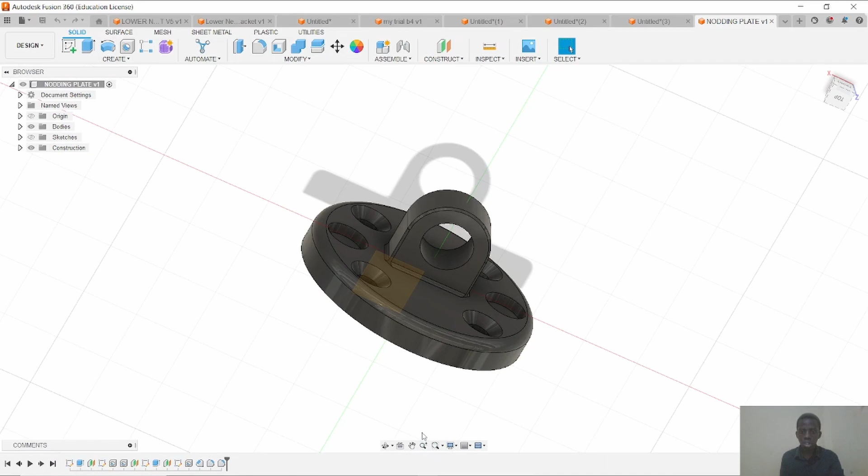Today we are going to be working on a different part, modeling a part called a nodding plate. We'll be able to see it and design it. Without wasting time, let's get started. So what we're going to be designing today is this feature - by the end of the video you'll be able to design this.

Let us go to the documentation, the drawings that have been given. So right here we have the nodding plate. Right here we're going to start by designing the circular body of 2.1 in diameter. Then we're going to create the circles, then later on we're going to create this other part. Let's get started.

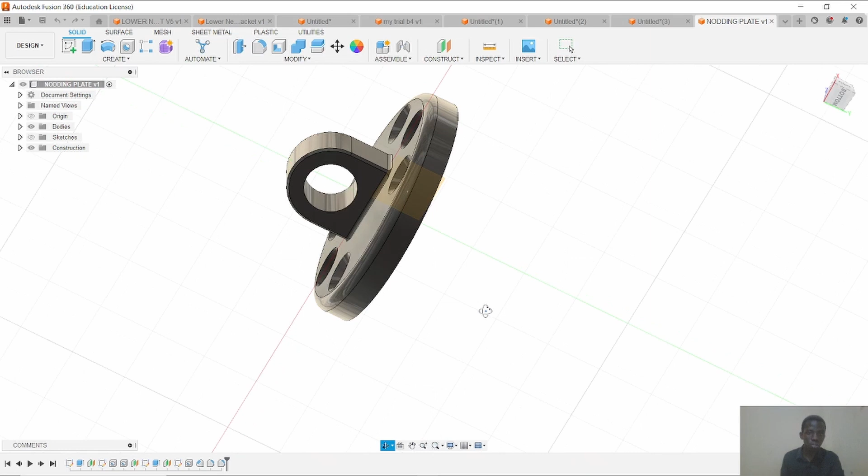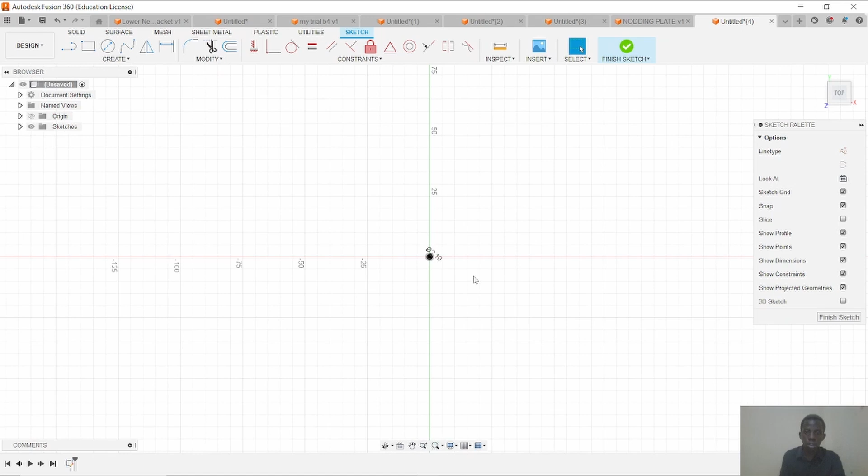Since you've already seen this, I'm going to come here, create new design, come to sketch, click on top. We're going to create our circle of diameter 2.1, I believe - should be, yep, 2.1, circle of 2.1. Enter. It's that small, so I'm going to zoom in.

Once I've zoomed in, I'm going to create a circle which is 1.5 where all these circles are going to lie. So I'm going to create a circle of diameter 1.5. I'm going to come back here, click on this. Actually we can do that after we are done with extruding the body. So let's actually get done with extruding the body, then we can come back to that.

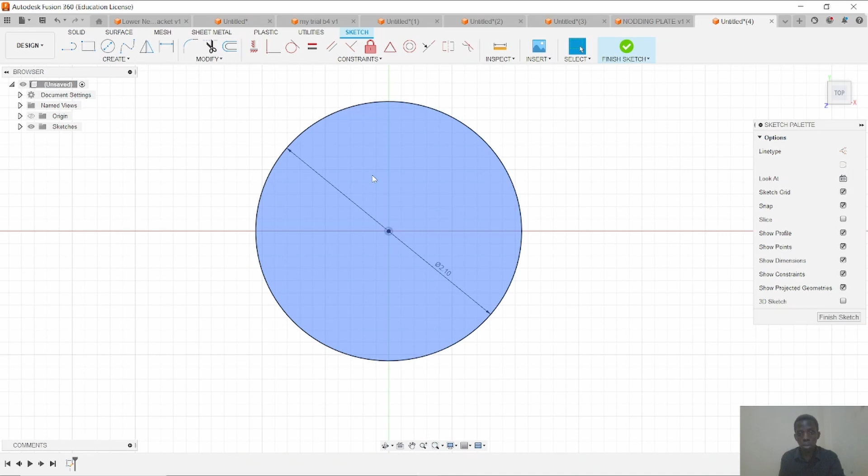So I'm going to extrude my body. You can see here the height of the body is 0.287. I'm going to extrude it by pressing E, 0.287 millimeters. Enter. Let's check on the side view. Yep, that is it. So after doing this, one thing that we're going to notice is...

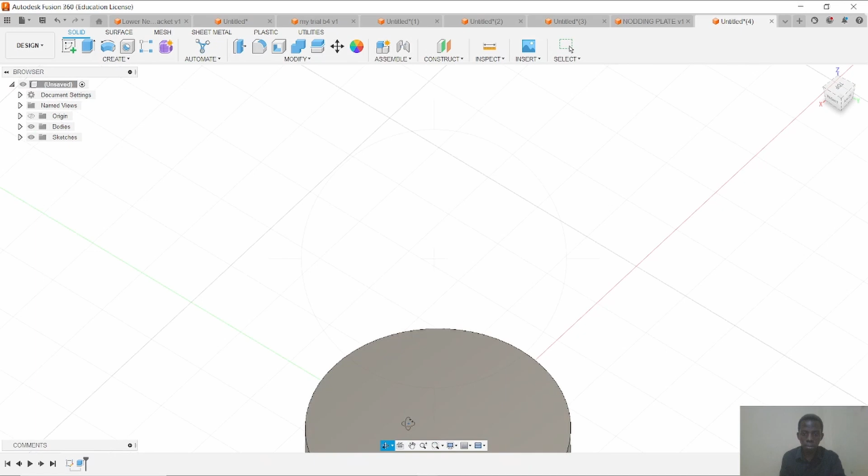Let's come this side. I want to click on top. Let's move it up a bit, or you can just press F6 if your function keys are operational or activated.

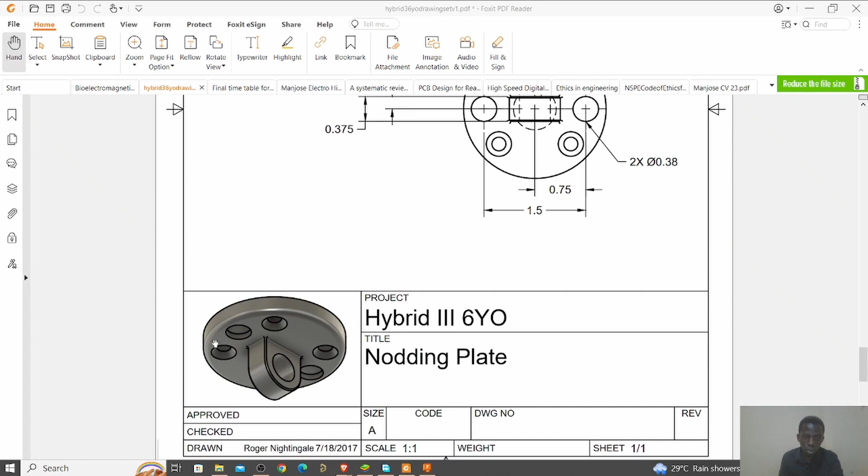After changing this to the top view, what I'm going to do is I'm going to create my circles right here. Let me shift this thing away. So I'm going to create my top circle. All these features are on the top, so I'm considering this part right here to be the top. We're going to create all these features on the top, then later we shall go back to the bottom.

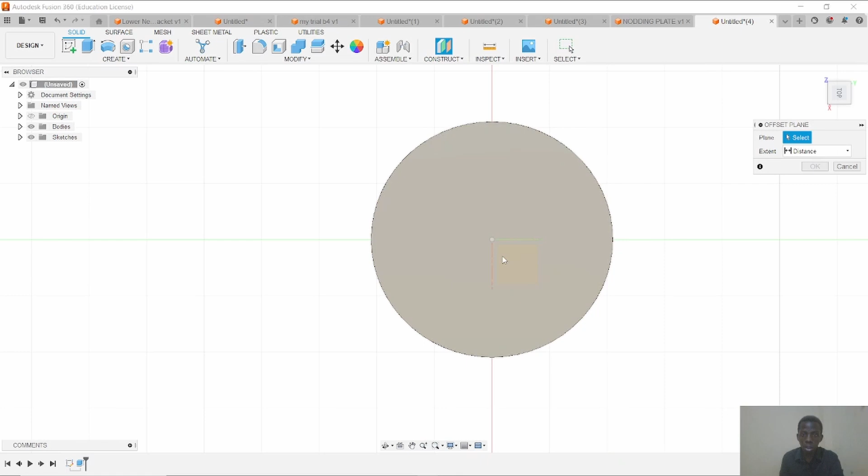What I'm going to do is come to construct, then create a construction, an offset plane right here on the surface of this body. Yes, we want it lying exactly on the surface of our body, as you can see. I'm going to click escape, then click OK. Then after doing that, I want to create a sketch on that surface, rolled the other way around like that.

So after this, what I want to do is create - what I like to do always is first create the diagonals, just in case I need them. I'm going to create another line vertically. After doing that, I'm going to select these two lines, shift select, and make them construction lines.

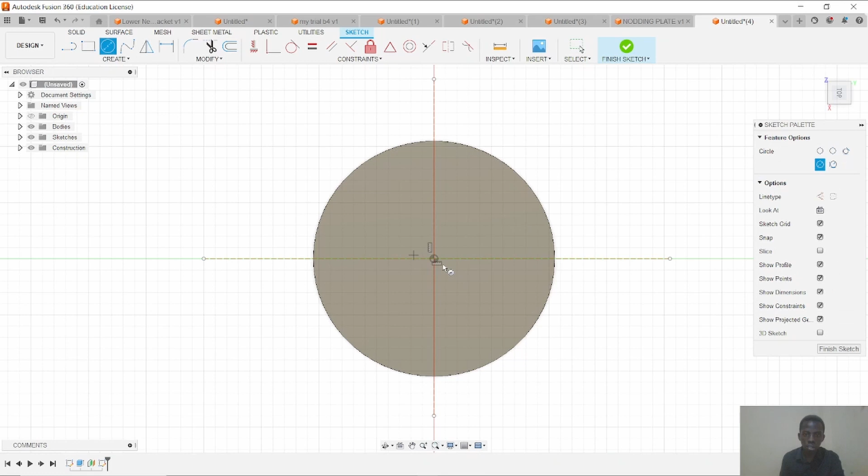Next thing I'm going to do is create a circle of 1.5 - we're creating this circle of 1.5, remember to position our circles right here, so when we're using the circular feature. I'm going to select that circle and make it a construction as well. Then next I'm going to create another line right here.

Let's escape that. Let's press D for dimension. I want this line to be at an angle of 45 degrees with that line. I'm going to click on yep, that. After doing that, cancel that. I'm going to select that line, make it a construction line as well - I want it to have no effect on our sketch.

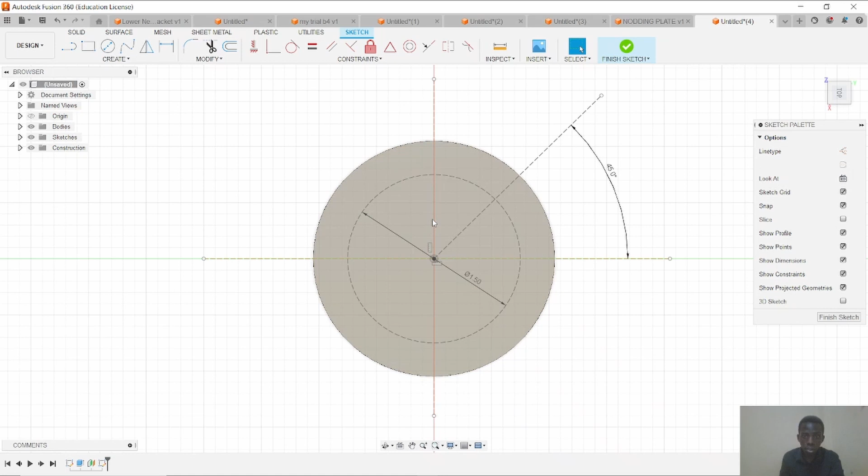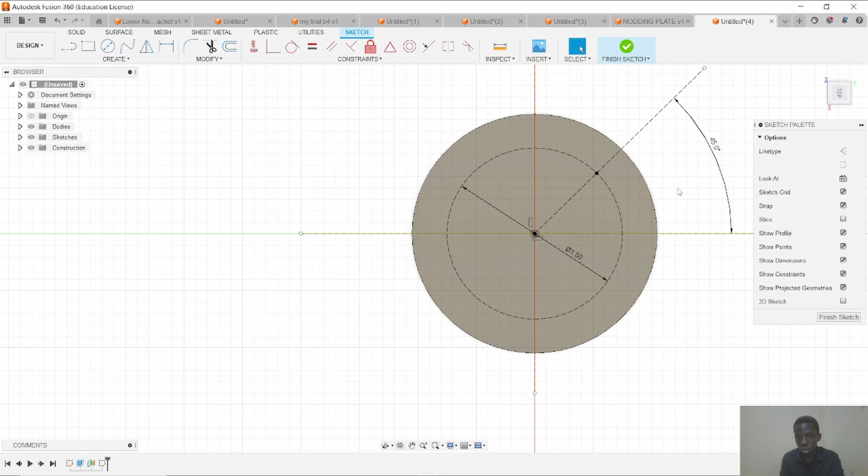After doing that, now we have a point to draw our circles. I'm going to come here, click on this, escape. So after we are done with that, let me cancel, delete, whatever - let's cancel that. So I'm going to zoom out and move our feature quite to the middle.

After doing this, I'm going to use a circular pattern feature to create points for these other 4 circles. So I'll come to create circular pattern, select that point, then select the center point right there. Now we have 4 circles, and as you can see, it has positioned all the points exactly where I want them.

Next we're going to create points for these 2 circles. Let's come to create point, zoom in, drop my point right there, zoom out, escape. Then I'm going to click on this and come to circular pattern.

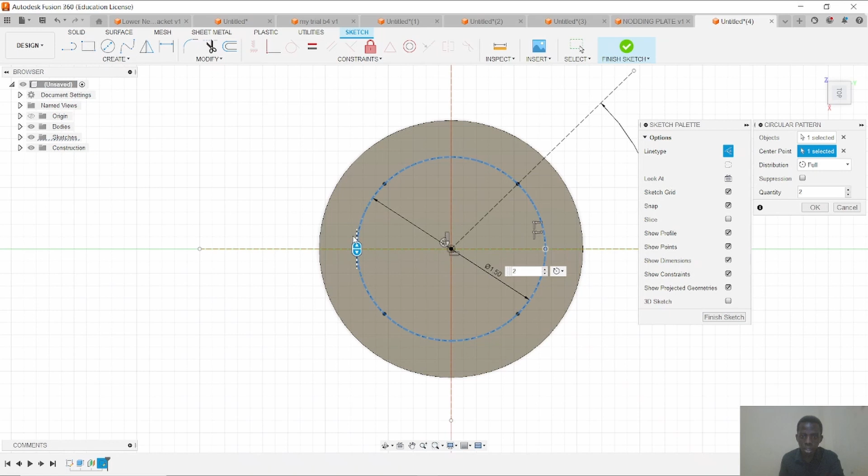I'm going to select the circle as well. For this case, I'm going to say there are 2, because it's only these 2 that I'm talking about right now. So it's going to position it exactly opposite my other feature. I'll say okay, and as you can see, a point has been created right there.

Whether I pick flat or angled drill point actually matters here, because remember our hole is not through — it's going to be hanging on the top, so we don't want an edged point. That is why I've chosen the flattened type of drill point.

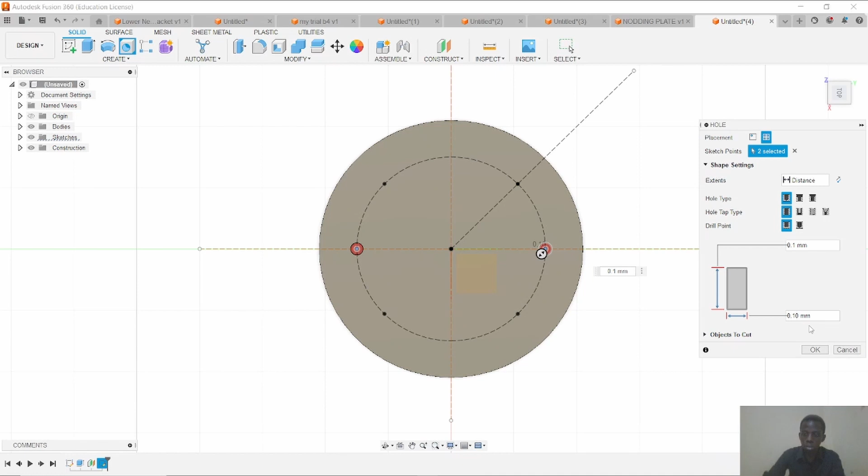So the depth we're going to be drilling is going to be 0.1, and the diameter of our drill circles is 0.38.

Let's look at it from the side so you can understand what I'm doing. Yep, that's what we're doing, escape, and I'll say okay. As you can see, we've created these 2 holes right there.

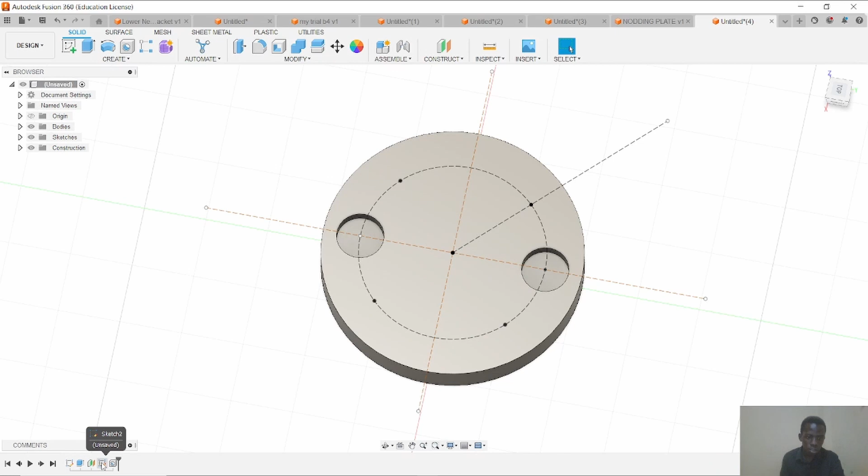Without creating another sketch, we're just going to go back to our sketch right here, right click, then edit sketch, so it brings us back to where we are.

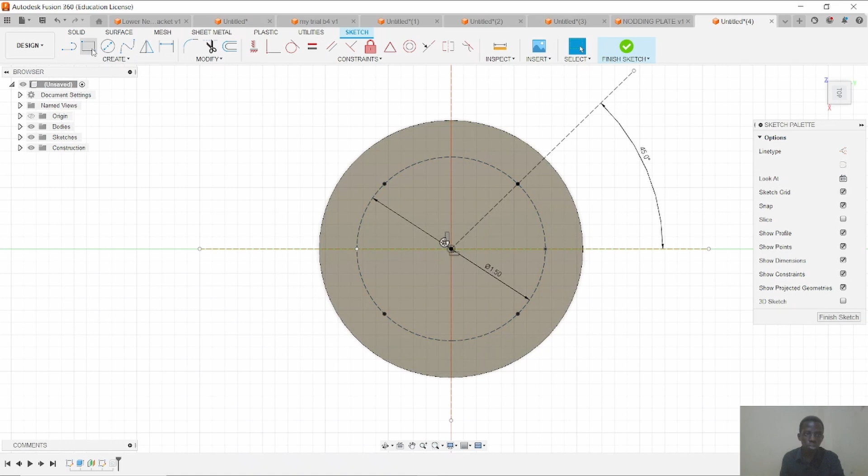After doing this, next we're going to select these 4 holes right here. Let's change it a bit so our 2 holes remain here and the 4 we have are right here. So I'm going to come to solid, hole, then select that, select that, select this, select this, since they are all similar.

So what features do we have on these holes? We see that they are through holes — as you can see, they are coming through. They are countersink holes, so I'm going to go to function and select C-sync as a countersink right here. This is a counter bore, but we're selecting a countersink. Do not worry about that — we shall reduce the diameter of the screw and all.

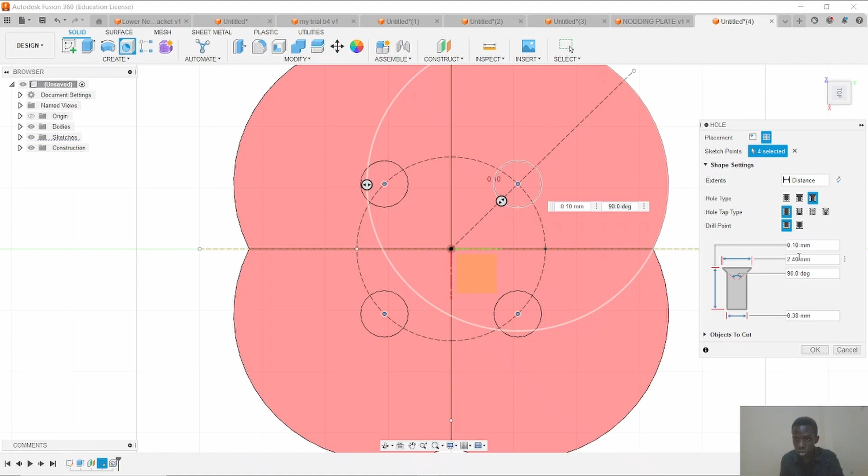So what are some of the features we need to look at again? We see that the outer section of the screw for this countersink hole is the same as this one, which is 0.38. Let's enter that value for the outer part: 0.38. As you can see, they have reduced.

Then the next thing we need to look at is the size of the hole. We're going to go with 0.206. Let me first enter this value so you can see why some of us decided to go with 0.206 — this value was actually too small and gave very small drill holes. So let me enter the size of the through hole here: 0.0206.

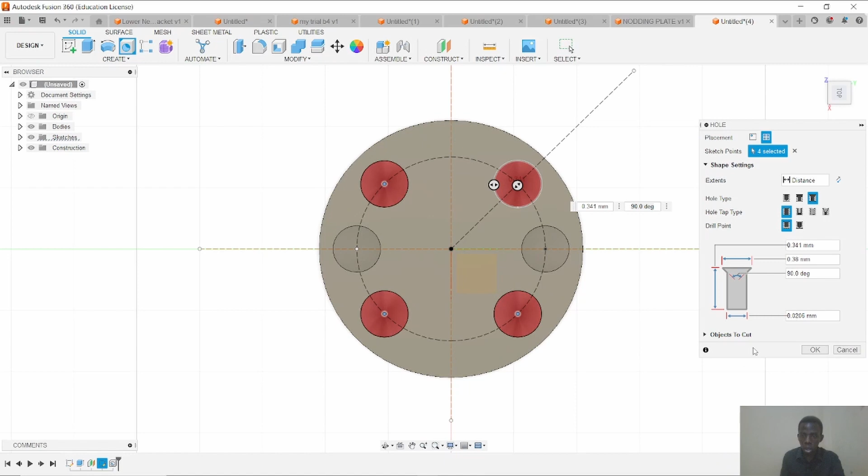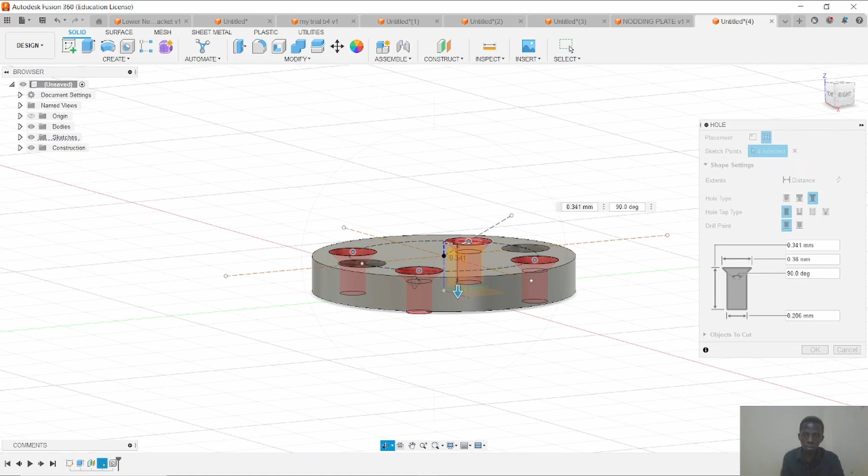Let me change the view, the orbit. As you can see, it looks more like a funnel than something a screw can actually fit into. That's why we decided to remove the 0 and go with a different value instead. That looks more practical, since you can have a countersink hole with a screw drilling right through at that diameter. So yep, that's what we basically did.

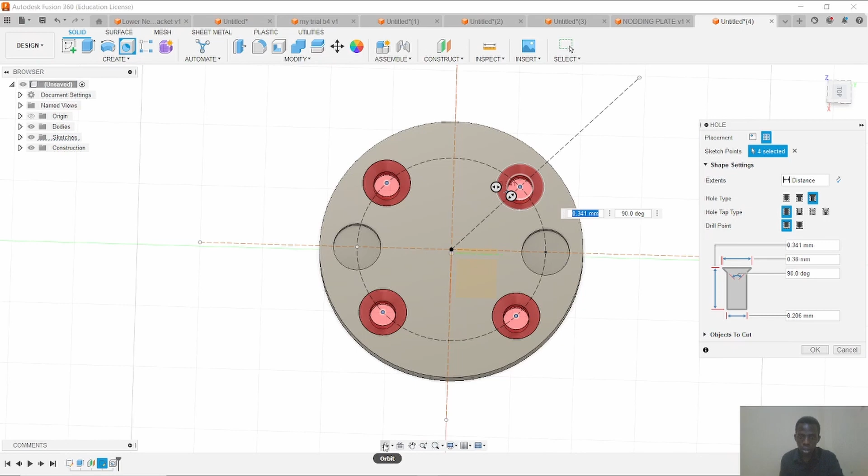So what other dimension do we need to change here? We're leaving the angle at 90 — this doesn't matter, because all we want is the drill point going through. So we could have also just chosen the height of our depth, which is 0.287, which is also fine.

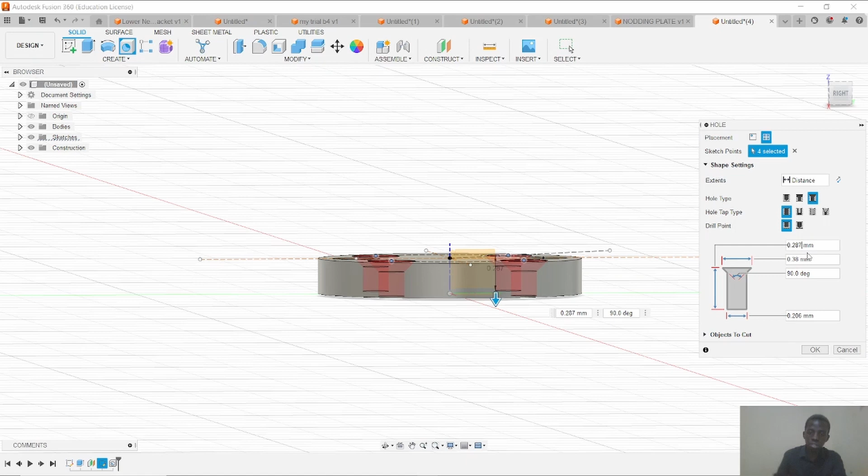0.287 is also fine, because it still creates the hole through. As you can see, it still creates the hole through. So it's still fine that we put the height of the material itself. So I'm going to click on OK.

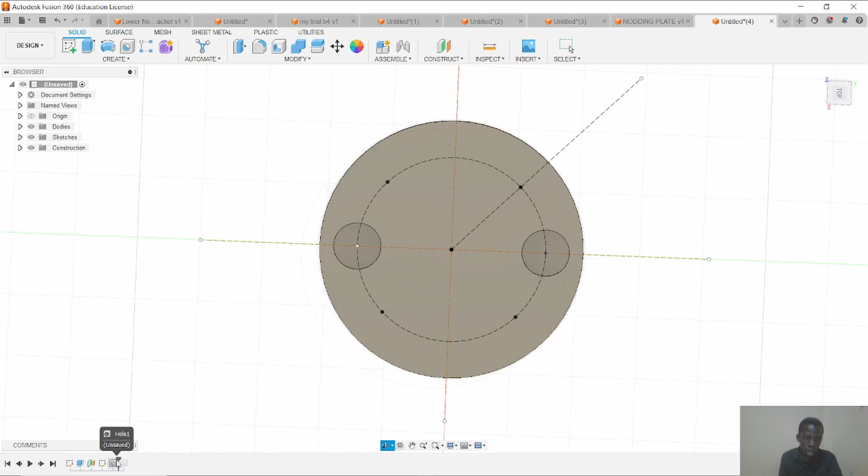After clicking on OK, we see that our features have not appeared, but that's because we went back in the timeline, so we have to extend back this black point to the last thing we've done. Then you'll be able to see the holes you've created. Let me spin it around so you can see what we have.

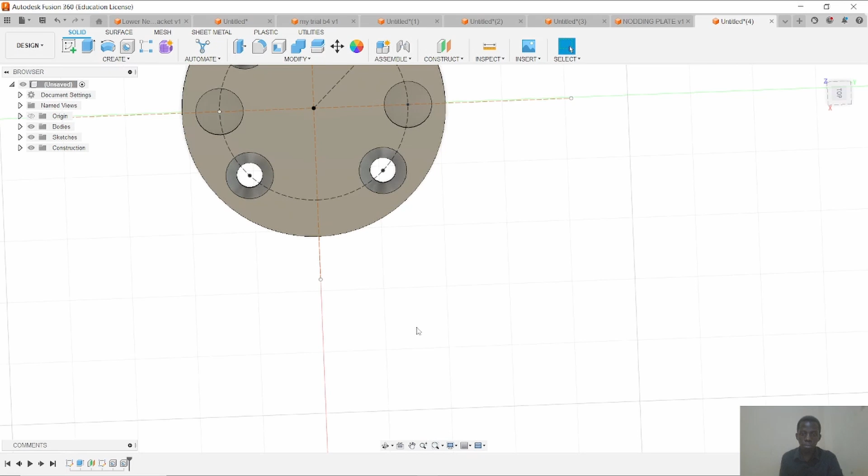Once we are done with all that, the next part we are going to do, so we are done with these parts right here. Let's turn back to the bottom part and create this last hole. Not really a hole, but almost the same.

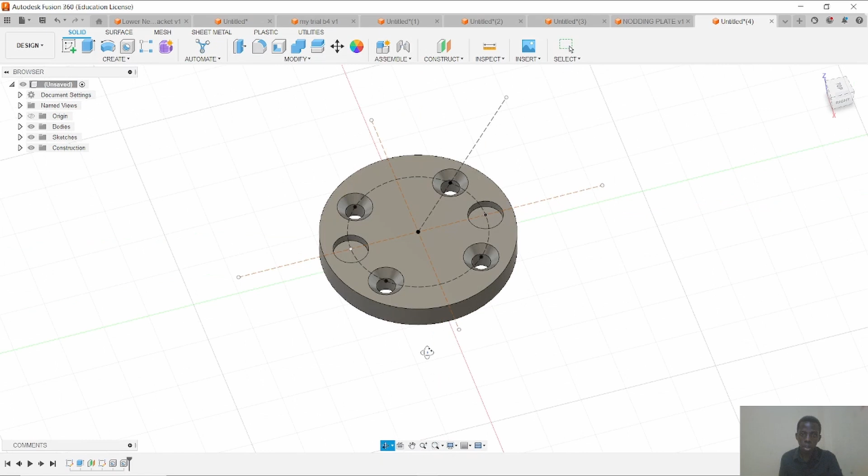It's not going through but ending on the surface, and it has a diameter of 0.63 and a depth of 0.13. Let's go ahead, spin our body and create that piece of magic right there. So I'm going to carry it right here.

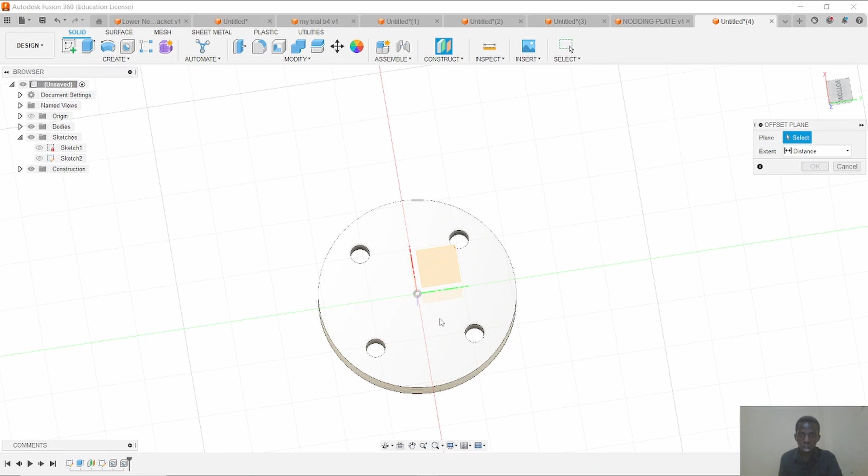I'm going to create an offset plane. But first I'm going to hide all the sketches we have done initially. So I'm going to come to construct, offset plane. I'm going to put it on this surface. I want it laying on the surface.

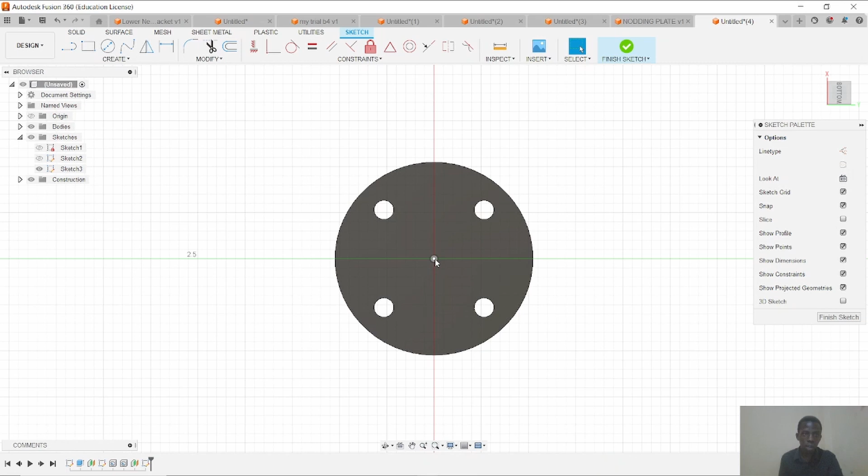Then I'm going to create a sketch right there. Then I'm going to spin it a bit, though it doesn't really matter, but I like my positions being the ones I'm used to. So this red axis on the vertical, green on the horizontal. After doing that, since we already have a point on the middle, we can just come to hole.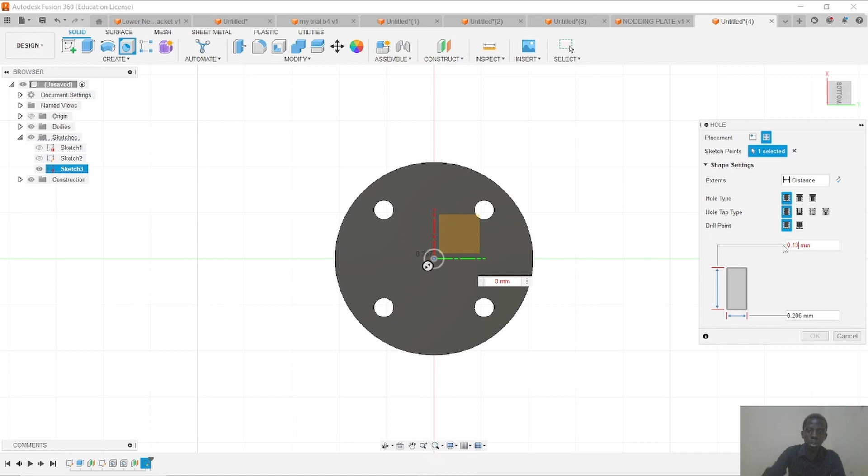Then I'm just going to click on that. So what we want is a simple hole of a diameter. The depth, we already know, is given. We have a diameter of 0.63 and a depth of 0.13. So depth of 0.13, then a thickness of

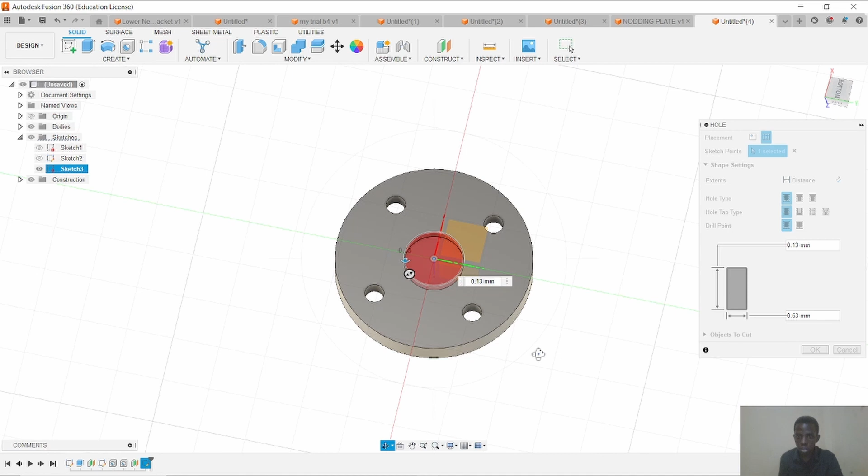0.63. Let's look at it from the side so you can appreciate what we're doing. So 0.63 and 0.13, that is exactly what we have done here. So I'm just going to click on OK.

Once we are done with this, the next part we're going to do is work on designing this upper top part of our model. This is actually easy as well, as you're going to see.

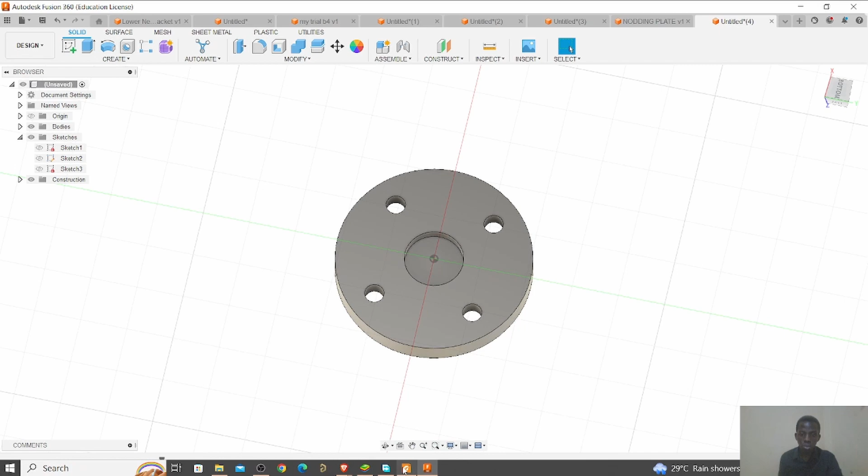So what I'm going to do is, let's look at this. You don't really need to remember, but let's see what's actually here. You see that this nice hanging part of ours is located on the surface where we place the holes. So what I'm going to do is rotate back to the other side, to the top right here, then select the top.

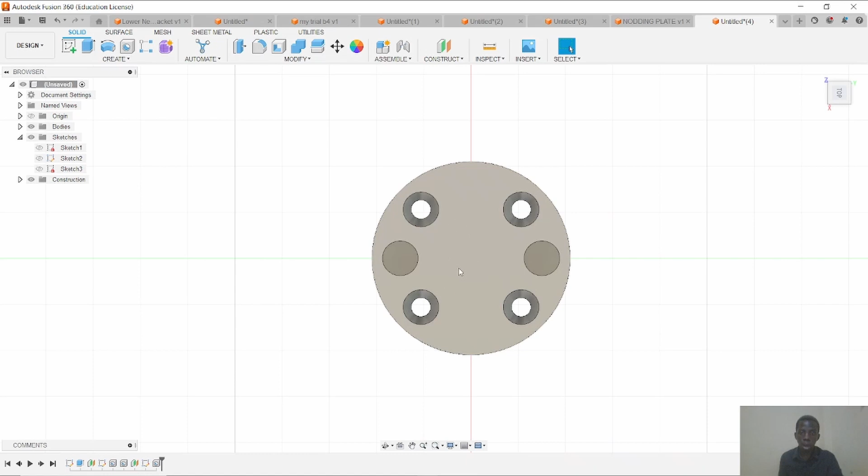After I've selected the top, this is where our body is going to be. So instead of actually drawing this thing in the direction I'm at, what I'm going to do is turn it the other way around, then draw it. Let me show you guys what I mean.

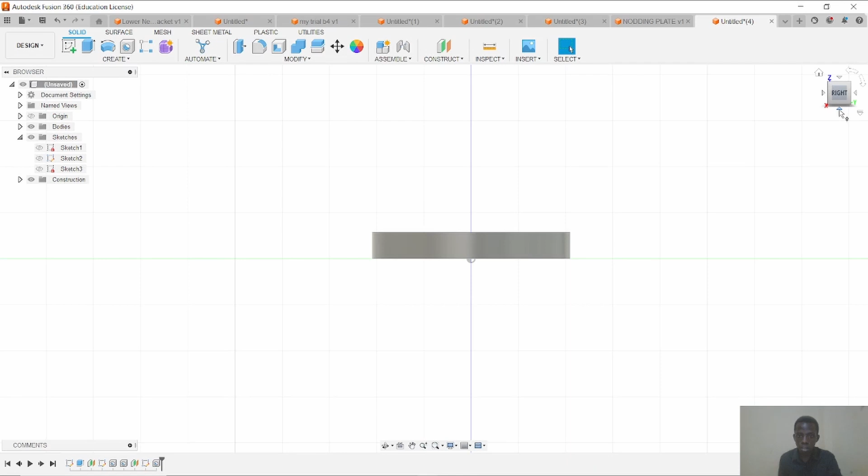So I'm going to turn it, turning it the other way around, actually like this. After I've turned it this way, let me ensure that I've really done what I wanted. So that is the view that we want from the right hand side. That is for me, it's from the right hand side.

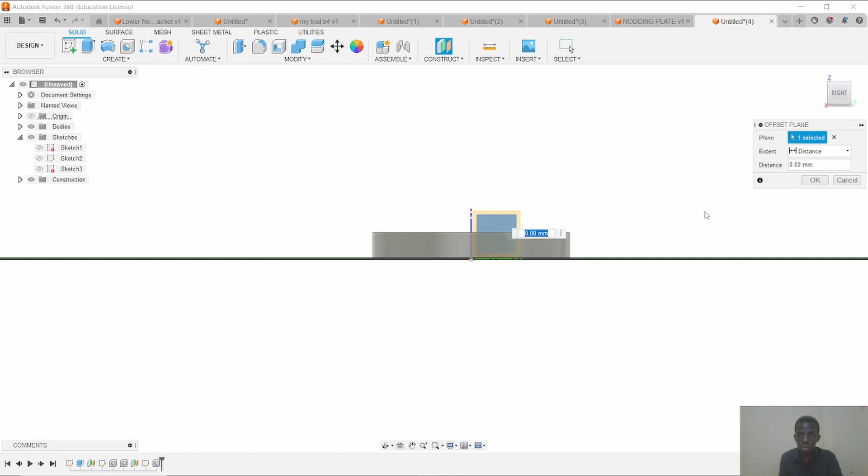So what I want to do is create an offset plane here, where I'm going to draw my rectangle, where I'm going to extrude that feature from. Let me show you what I mean by what I've just said. I'm going to select this plane, then I want to create a sketch right there.

After I've selected all these, what I'm going to do is create, number one, a bottom line right here. As you guys know from my previous videos, I like to draw horizontal lines and vertical lines to ensure that I'm as accurate as possible.

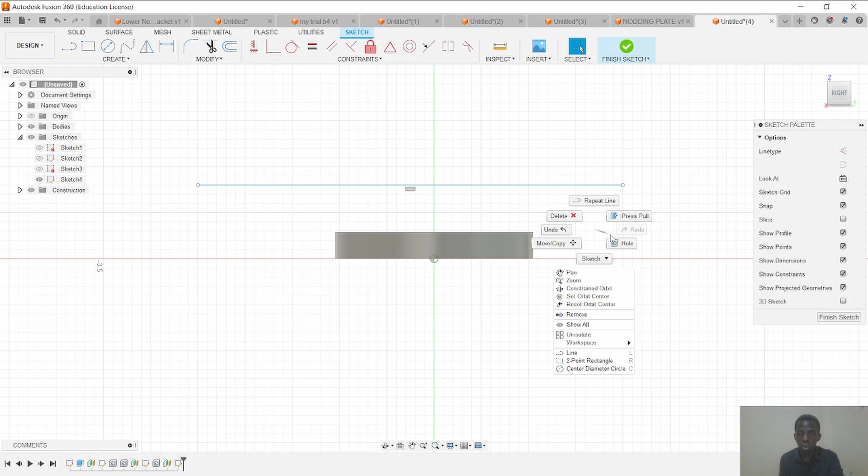So what I'm going to do is position this exactly on top of this plane surface. How am I going to do that? Let me escape this, escape. When my escape isn't working, let me just delete whatever it's trying to do.

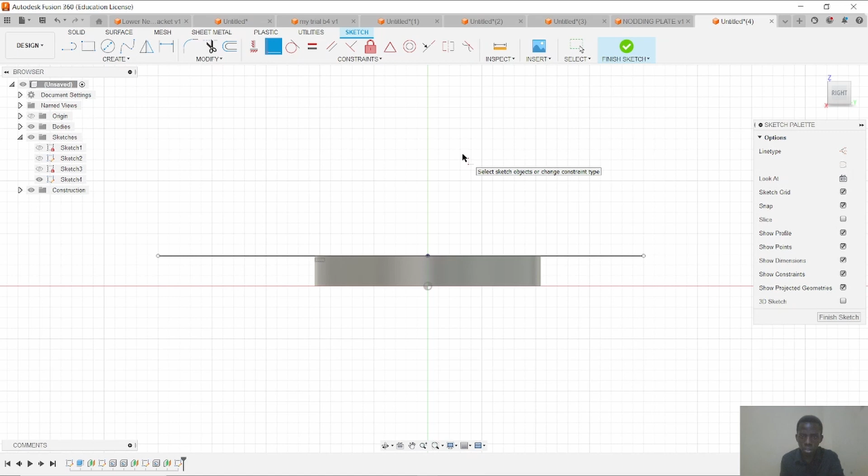So what I'm going to do is select this line, then select coincident, then select this upper part, such that my line lies exactly on the surface of that body of ours. So I'm going to escape, click on my line and make it a construction line.

Then I'm going to come back to line. I'm going to draw a vertical line right there, like so. Select it, make it a construction line. After I've done this, the next thing I'm going to do is create a rectangle.

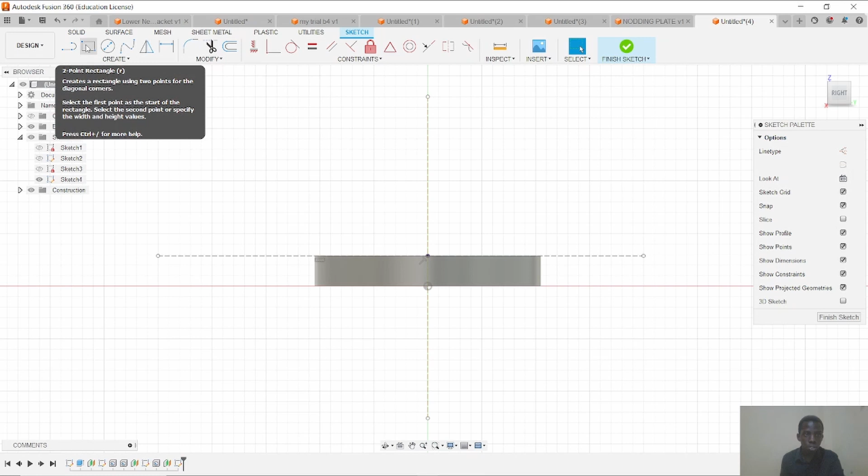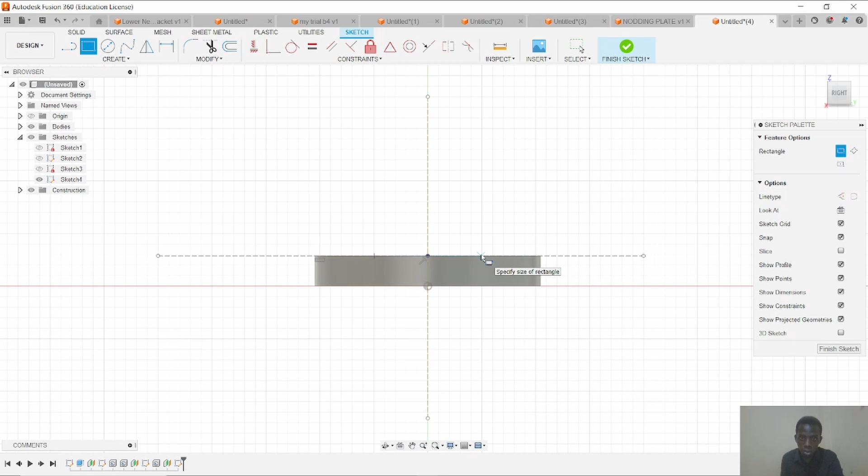As I explained in the video you guys saw, we use a rectangular dimension and put a circle inside in order to generate that top part you're going to see. So what I'm going to do is position my rectangular sides to be symmetrical on both sides to the vertical axis, then drag it on top.

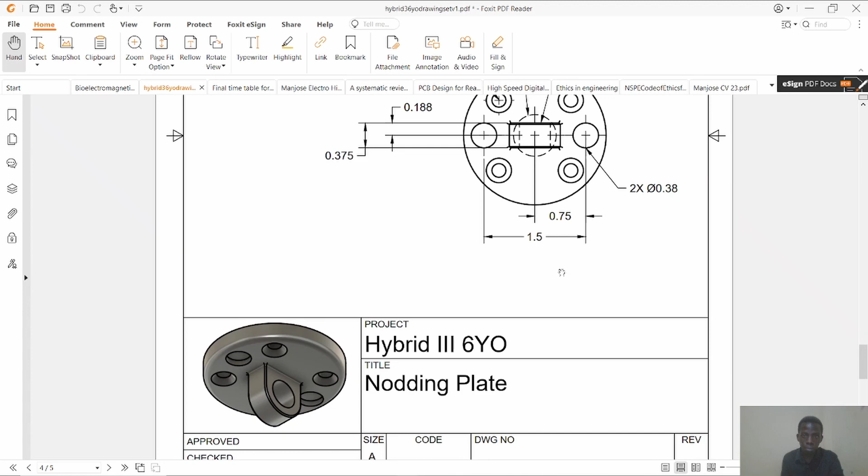After I've created that, I'm going to change its dimensions, but first make this symmetrical. One important thing I forgot to mention is that when constructing a construction plane, we left it at 0,0 because it lies exactly at the center. So I'm going to draw our figure, then extrude it symmetrically to design this feature.

Let me go back to this view. With the help of this, I can position myself well. After doing this, I want to arrange these two sides symmetrically such that when you change their distance, they won't change in a manner we do not want.

So I'm going to click symmetry, and click this side and this side, so I'm constraining them. That's what I'm doing, adding constraints to my sketch, so they are constrained symmetrically, and that is okay.

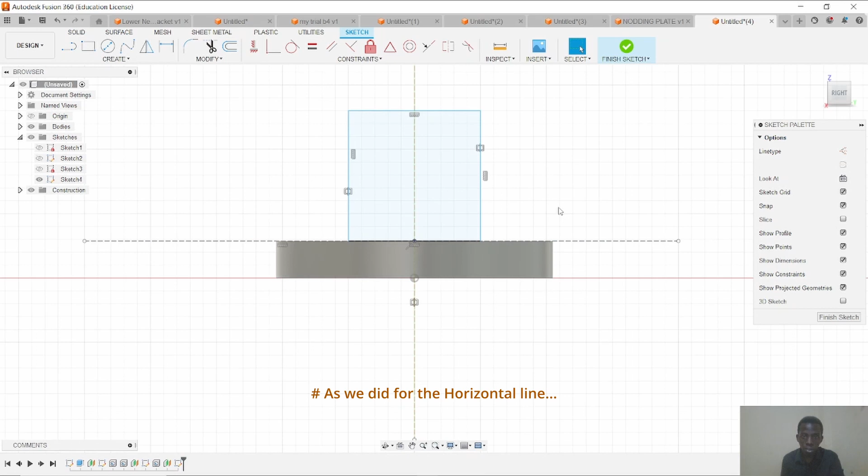That is nice. After that, it's also important to see that my rectangle is lying on the surface. If it's not, click on the rectangle, use this coincidence, then move it exactly to this point, as we did for this horizontal line. That's what you do if your thing is not lying on the surface of our body, because we are going to join them.

Now after doing this, I want to change the dimensions. I'm going to click on D, or come to sketch dimensions, and pull it this side. This is 0.75, as you guys can see from here - 0.75 is the width and 0.75 is the height. So I'm going to come back here, then type in 0.75.

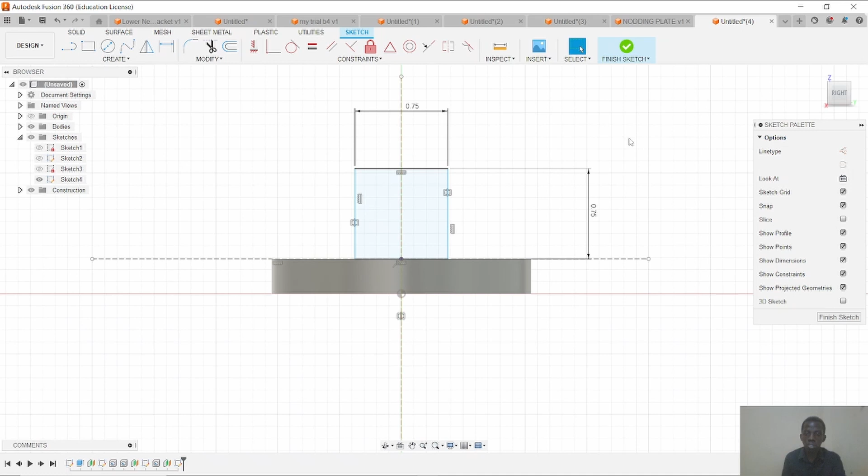Then this side as well, I'm going to change it to 0.75, enter. As you can see, it positions them automatically, not pushing one to the other side, but bringing all of them together in order while leaving them symmetrically. That's the reason we chose a symmetrical positioning of these two with reference to the vertical line.

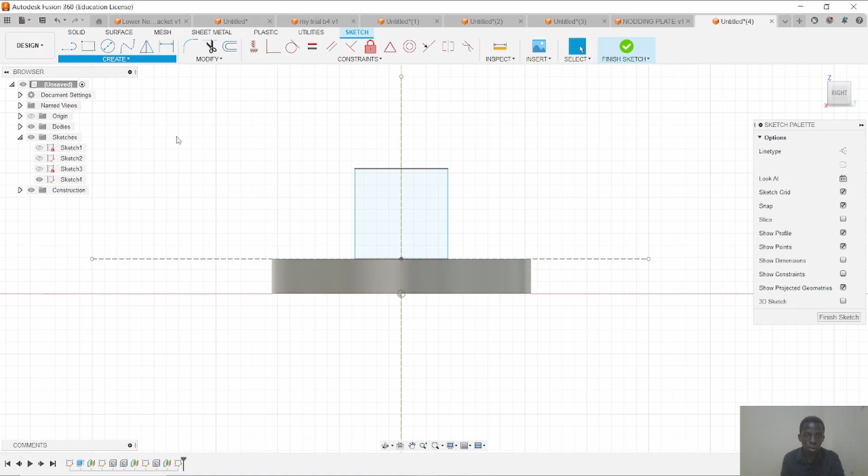After doing that, I'm going to hide the dimensions and constraints so we have a simple sketch to work with. Then I'm going to come to create circle, click on 3 tangent circle, and select 3 sides of my figure, so it automatically draws a circle here.

After that, the next thing we want to do is create this inner circle of diameter 0.455. So I'm going to come to circle, then diameter of 0.455, then enter it.

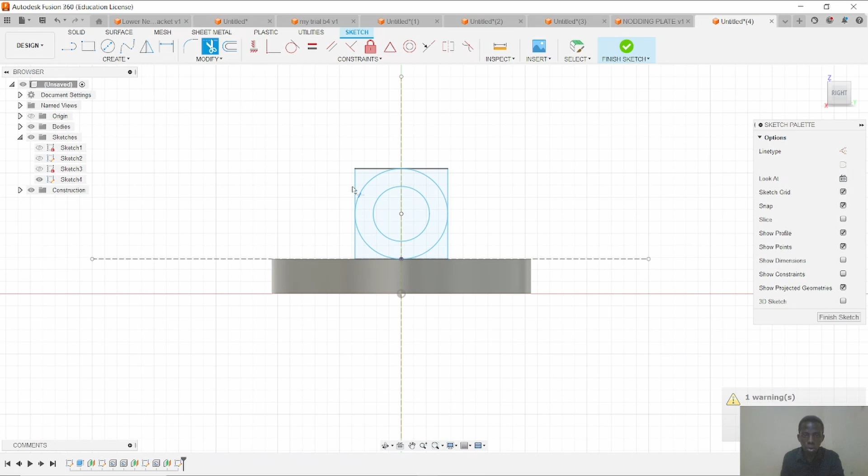After that, the next thing we're going to do is trim off the features we do not want. These are not really important to us, so we're going to trim them off - even this side of the circle and this side of the circle, so we remain with only this. After we're done trimming, I'm just going to escape.

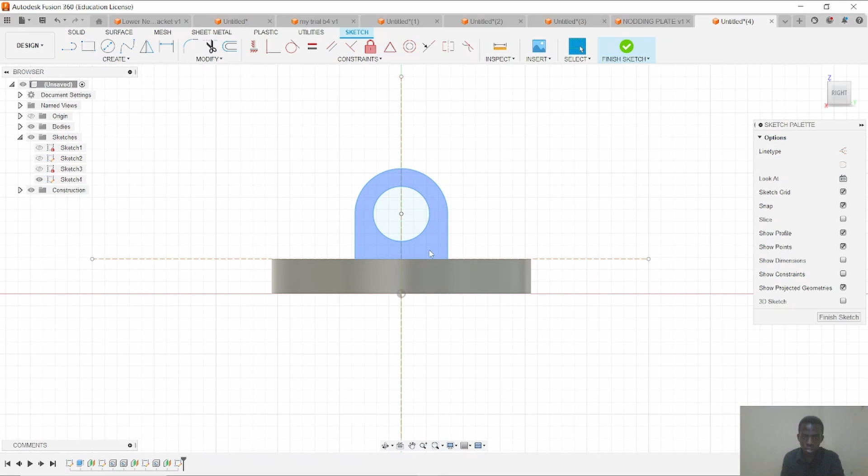Then I'm going to select this part here, as you're seeing. Select this, then I'm going to extrude it - I'm going to extrude it symmetrically.

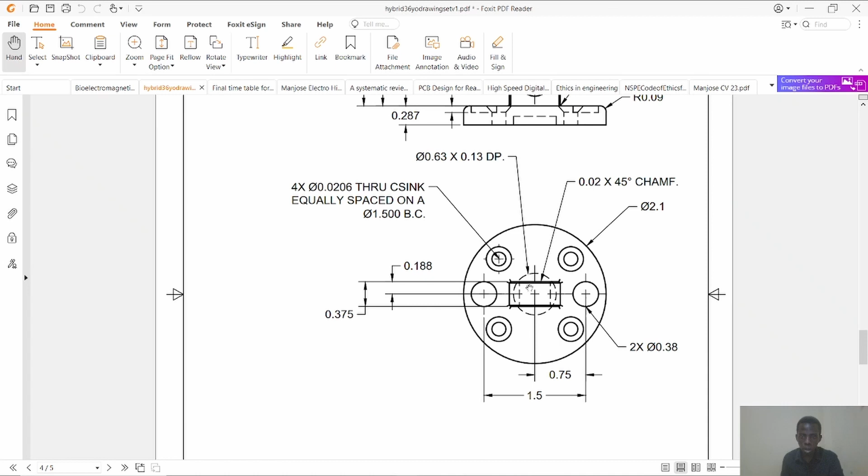So now we're going to extrude it. Let me first change the dimension of view so you guys can see exactly what we're doing. I'm going to extrude this feature symmetrically to create this thickness. We have created this design, now we're creating this thickness.

We know that the thickness of our figure, this top figure right here, is 0.375 millimeters.

We're going to divide 0.375 millimeters by 2, since we're going to do half of that distance this side, half of that distance this side, since we're moving the extrusion symmetrically. 0.375 divided by 2 is 0.1875.

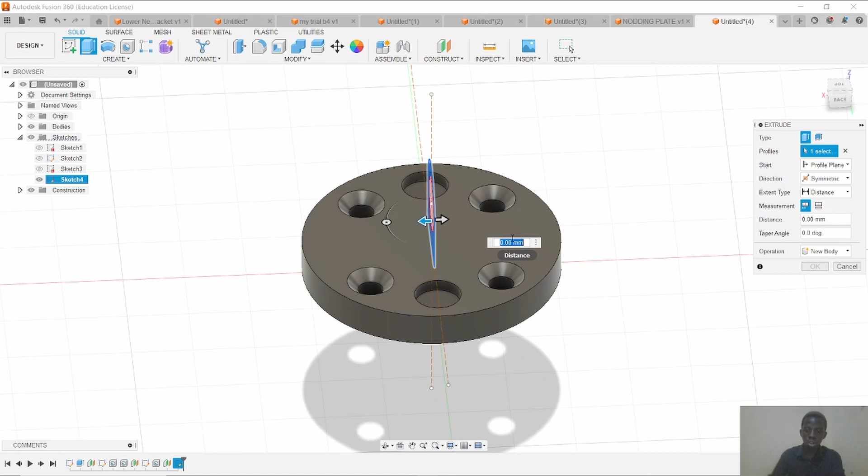I'm going to escape that, then change it to 0.1875. As you can see, it has extruded our figure symmetrically on both sides.

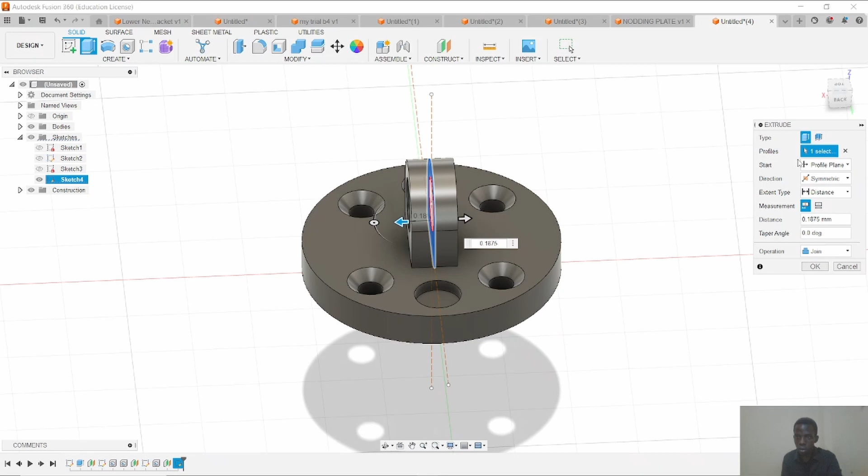Make sure this join feature is activated, because we want it joined, not new body, not new component, but joined. After all that is done, I'm going to click OK.

As you guys can see, we have created that upper notch that most of you might have been afraid of. We have created it, as you can see right here.

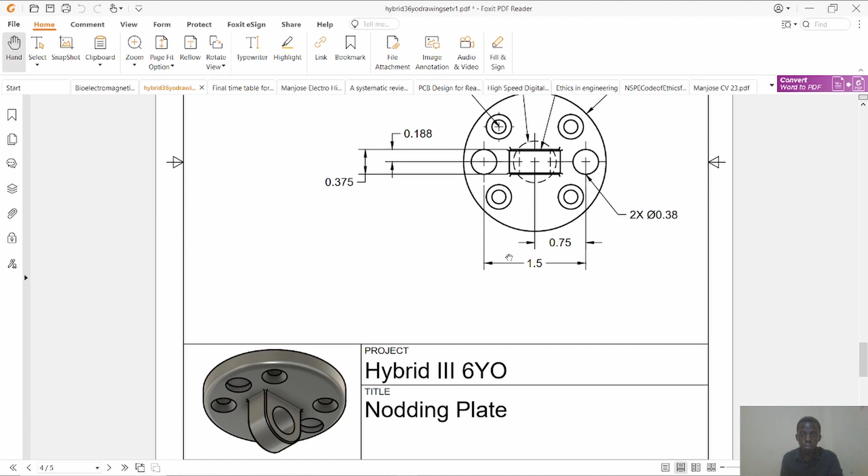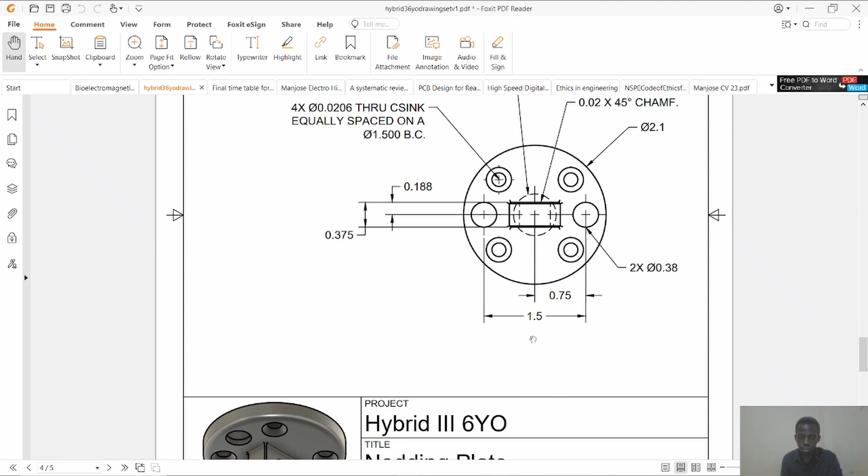Let's start by filleting our edge here of the body. I'm going to close all sketches, then hide all sketches. Then I'll select F for fillet on your keyboard, and select this edge. Make sure your edge becomes black, not the surface changing — what we want is the edge turning black.

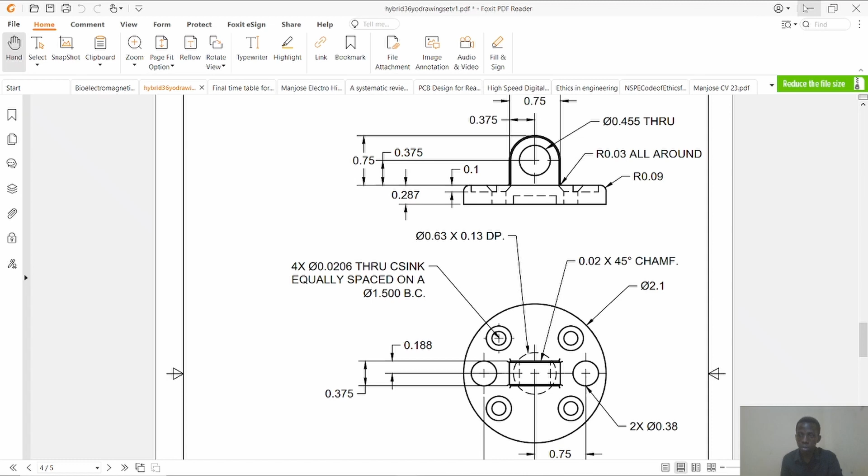I'm going to select that and change it to 0.09. That's what I'm going to select, 0.09. I'll click enter, and that is it.

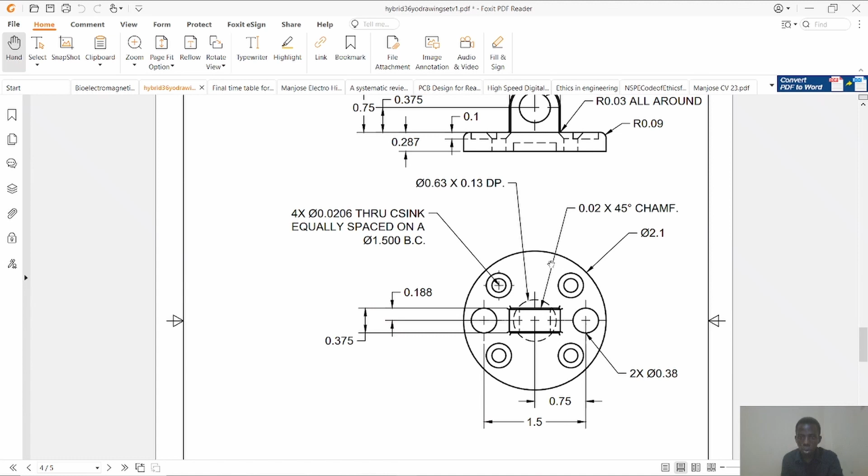Next, we want to fillet these edges. Going back to our drawing right here, I'm going to fillet this cornered part by 0.03 all round, meaning for all the sides of the thing. The dimension is 0.03.

I'm going to click on fillet once again, F, then select this edge right here, this edge, then spin my body. Remember it's all round, so I'm going to select this edge as well, and this edge as well.

We're going to fillet it by 0.03. So the value we're going to put here is 0.03, then we're going to enter.

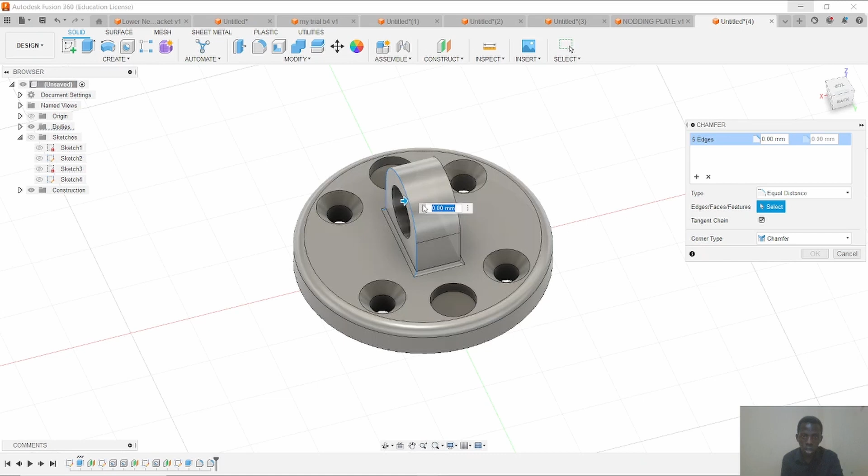After filleting, next we're going to chamfer this upper part of ours, using 0.02. We're going to come to modify, select chamfer, then select this edge, then select this edge as well. Then I'm going to select 0.02, enter.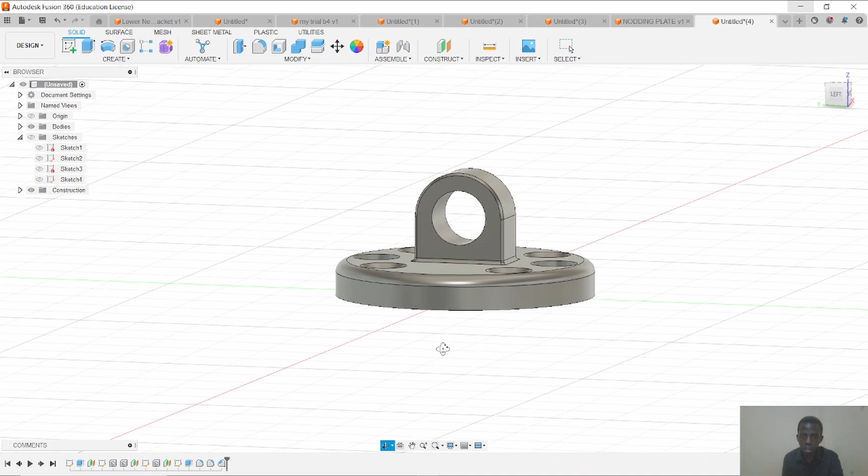After we've done all that, we have finished editing every part of our body that we need to edit. As you guys can see, every part of our body has been edited from top to bottom. Let's look and see what else we haven't done — we've done basically everything here.

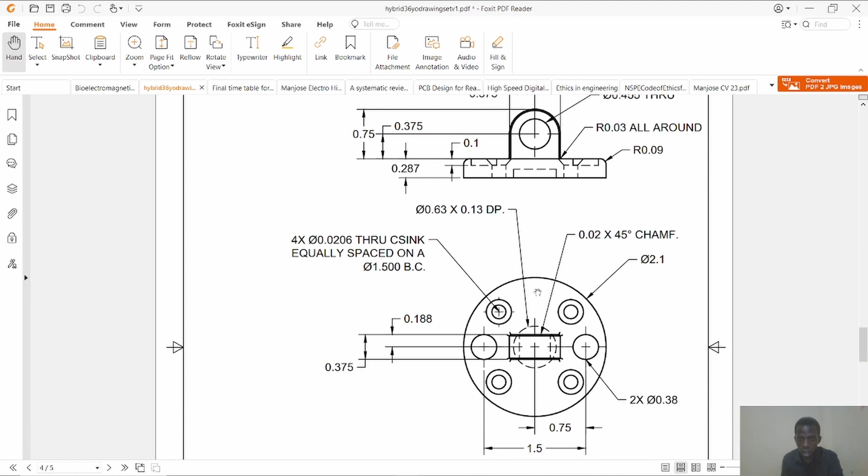The circle, we didn't need to create the circle diameter because we already used the tangent circle to create our center point. We used this. Yeah, we have basically done everything.

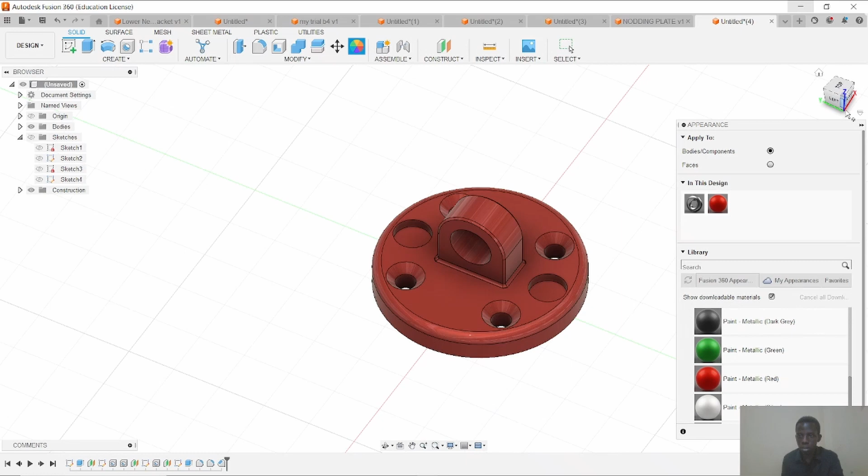So the last thing we can do is add the appearance, edit the appearance. Of course, color is some very important thing we all need to appreciate. I'm going to select the red and drop it there — yep, as gorgeous as it is.